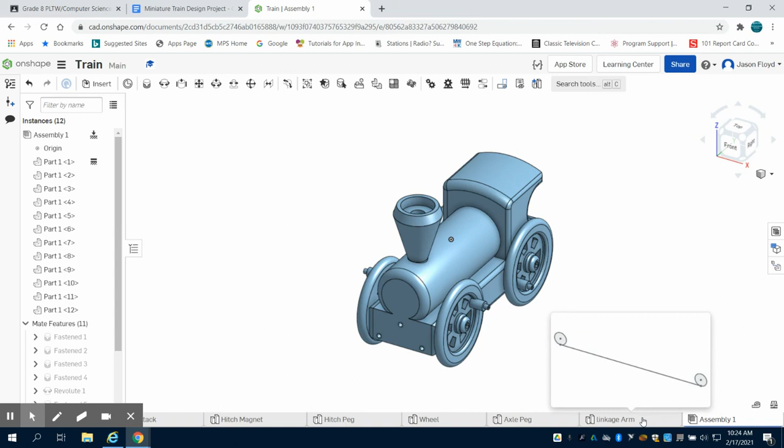So in the previous video, we constrained the wheels using the axle pegs. Now we're going to make the linkage arm. Again, you can see I opened up a new part studio here.

I'm going to create a sketch, place it on my front plane, and draw two circles. The first one I'll put at the center point, and that circle I'll make 0.375. Then equal with this, I'm going to draw another circle, 0.375. I'll dimension these circles from center point to center point, 3.5 inches. Again, you can see I'm getting all this information from here.

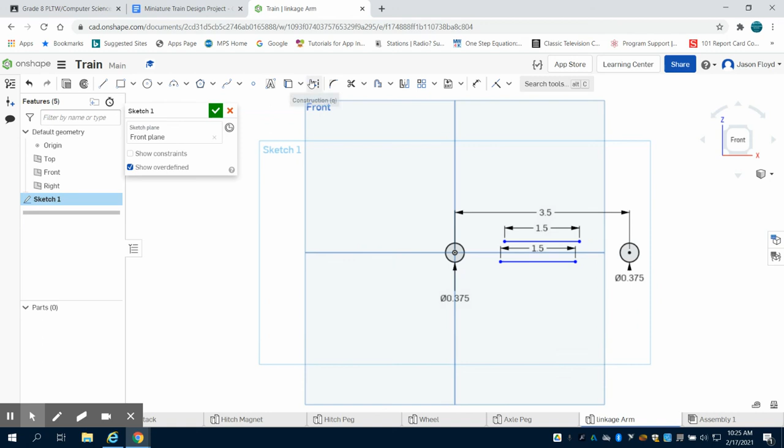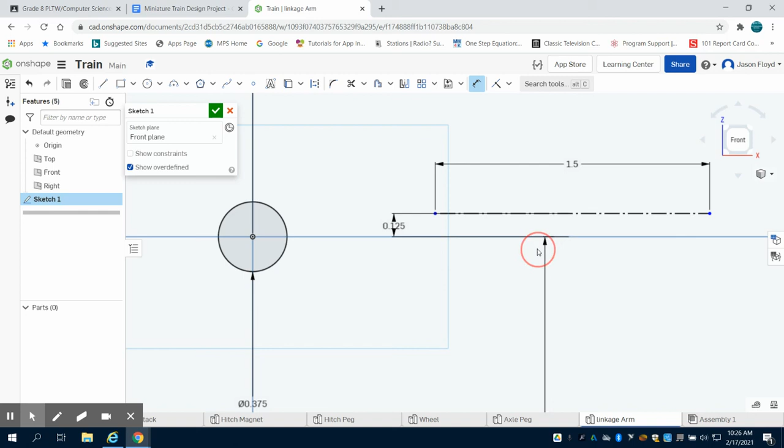Next I'm going to draw two lines, 1.5 inches each. Then I'll go to my construction line tool and turn both of those into construction lines. I'm going to dimension both of these from the center line, 0.125 inches.

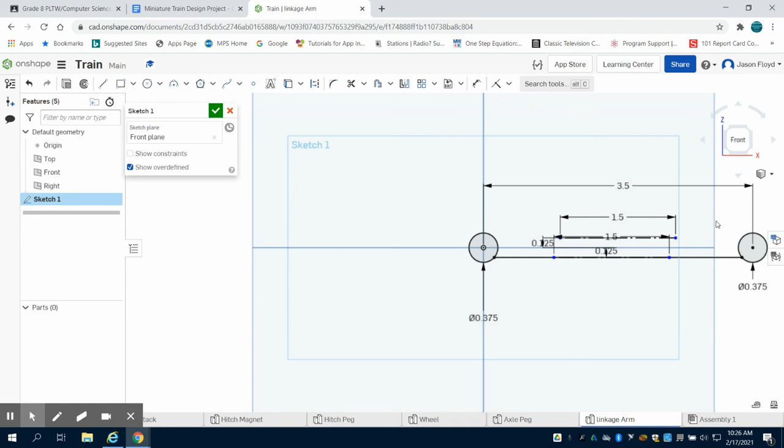Next I'm going to grab my line tool. I'll come even with this construction line until I intersect with a circle, and draw a line straight across using that construction line until I intersect with the circle over here, then escape. I'll do the same thing using that top construction line as my guide.

Now those construction lines are no longer needed. I could use my trim tool now and trim away this section on each side.

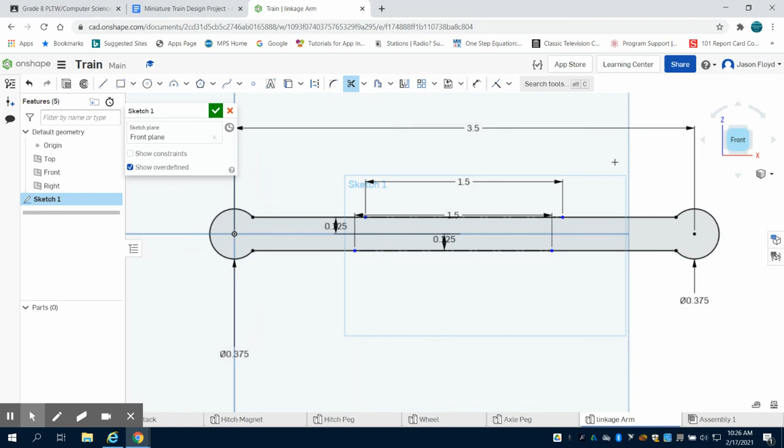Next I'm going to grab my circle tool, and on each of these center points I'm going to make a hole for my linkage pin, and these holes need to be 0.125. I'll do the same thing on the opposite side, again 0.125.

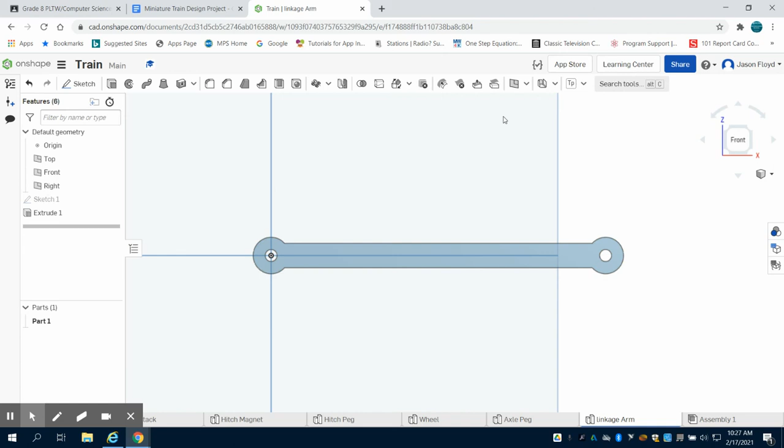Now we can come up to extrude. I'm going to extrude this again to the depth of 0.125. And you can see I have that linkage arm designed according to specifications.

Now that that linkage arm is done, we're going to move over to the assembly, click Insert, and bring in that linkage arm. We're going to use that same revolute mate that we've been using.

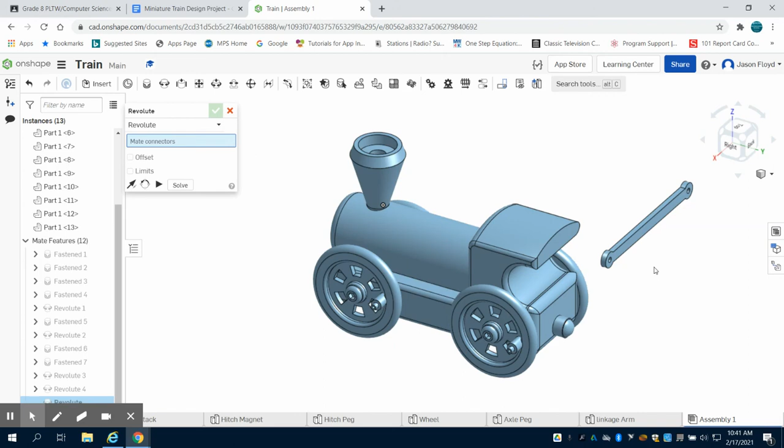I'm going to come here and choose the backside center of this one. Let's go to the front first. I'll choose the backside center of that peg right there, and then I can green check mark it, and that's done.

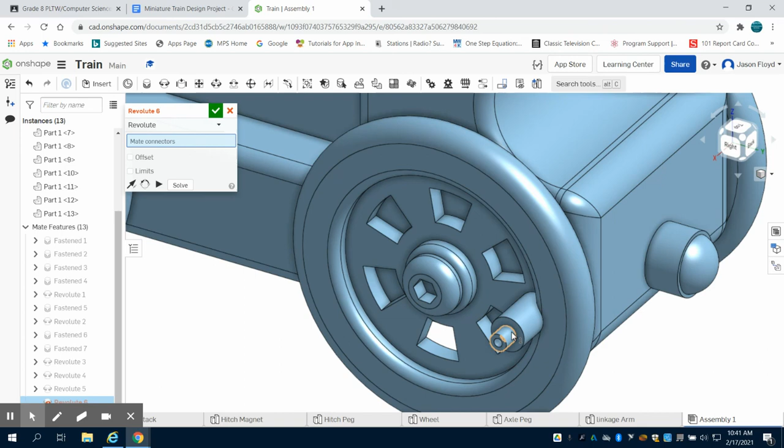So I'm going to come here and choose that same revolute mate. I'll choose that backside center. Now it's important that I rotate this around and find that same point, that backside center. I don't think I selected the right one—I should get an error of. Nope, I did not get an error of that. So we can see now that our wheels are linked together.

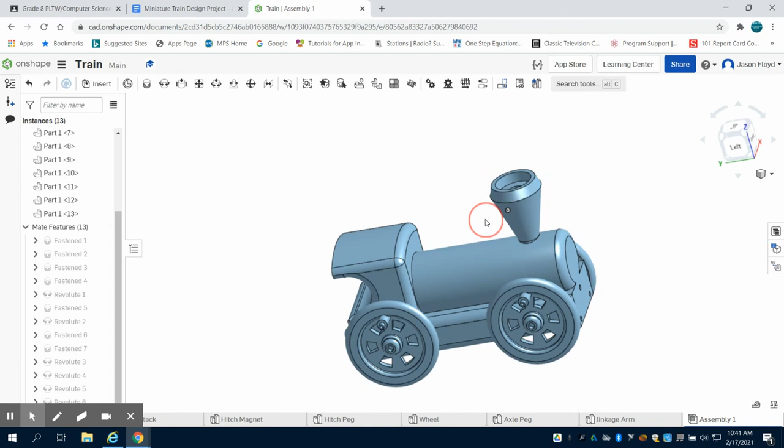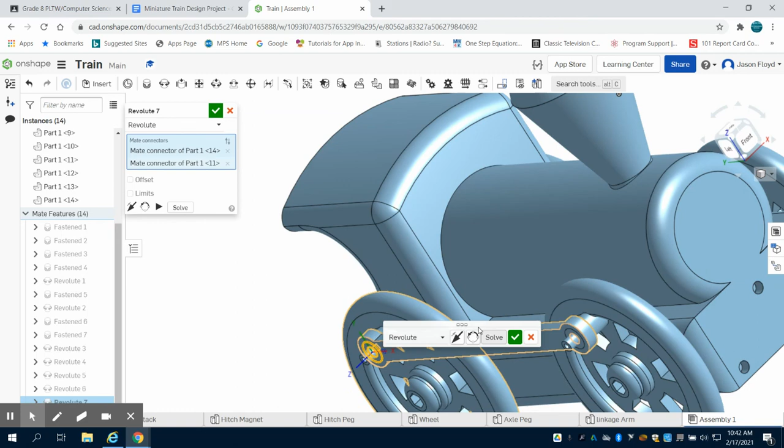We're going to do that same process on the other side. I'm going to insert that linkage arm and click on that revolute mate. I'll choose this backside center of that hole right there to the backside center of this peg right there. I'm going to have to flip my axis on this one.

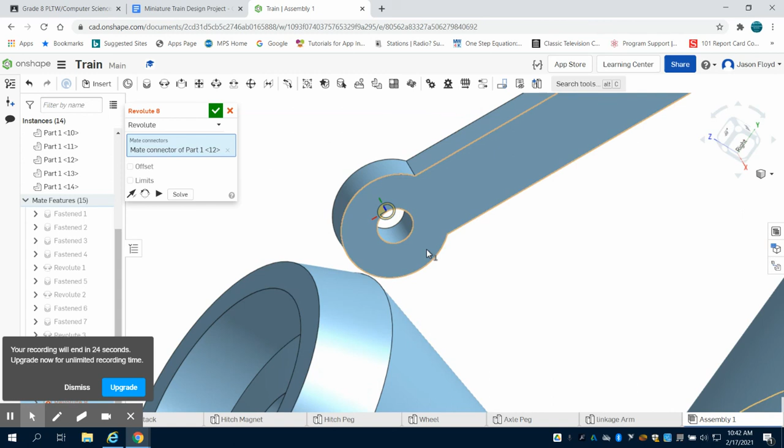It just happens that it lines up, so I'm going to have to move that off to the side so I can see things a little more clearly. I'll go to my revolute again, choose that backside center, rotating around to my backside center there, green check mark, and we now have both of our wheels with our linkage arms.